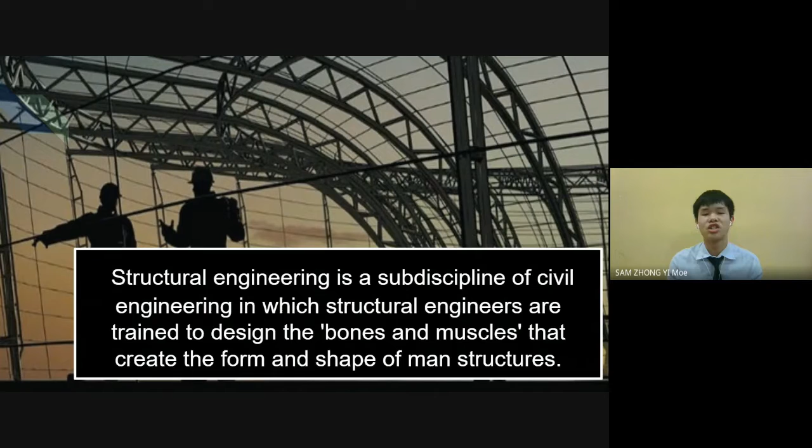Structural engineering is a subdiscipline of civil engineering in which structural engineers are trained to design the bones and muscles that create the form and shape of man-made structures. Structural engineering includes all structural engineering related to the built environment, including buildings, bridges, dams, roads, and tunnels.

Roles of structural engineers are: first, analyzing blueprints, maps, reports, and topographical and geological data. Second, estimating the cost and quantities of materials, equipment, and labor. Lastly, inspecting project sites to monitor progress and ensure the project is being constructed according to the design specifications.

Next, I'd like to introduce geotechnical engineering. Geotechnical engineering is the branch of civil engineering concerned with the engineering behavior of earth materials. It is the study of the behavior of soils under the influence of loading forces and soil-water interactions.

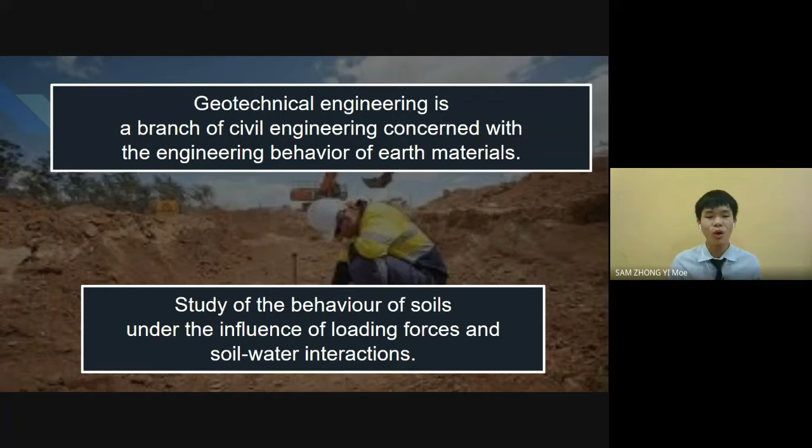Geotechnical engineers use principles of soil mechanics and rock mechanics to, first, investigate subsurface conditions and materials; second, determine the relevant physical and chemical properties of these materials; and lastly, assess risks posed by site conditions.

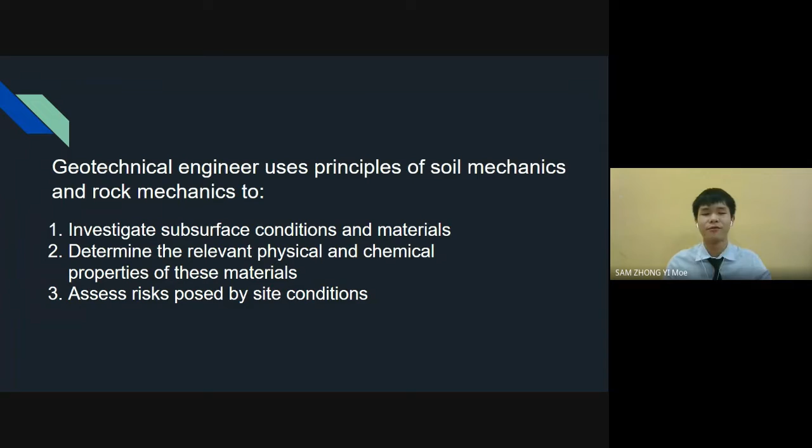Next is about geological engineering. Geological engineering is the application of geological knowledge to the siting, design, construction, operation, and maintenance of civil engineering structures and facilities. The roles of geological engineers are, first, analysis of past and future ground behavior.

Second, mapping at all scales. Lastly, geological engineers also have the job of designing mines to remove minerals in a safe and efficient way for use in utilities and manufacturing.

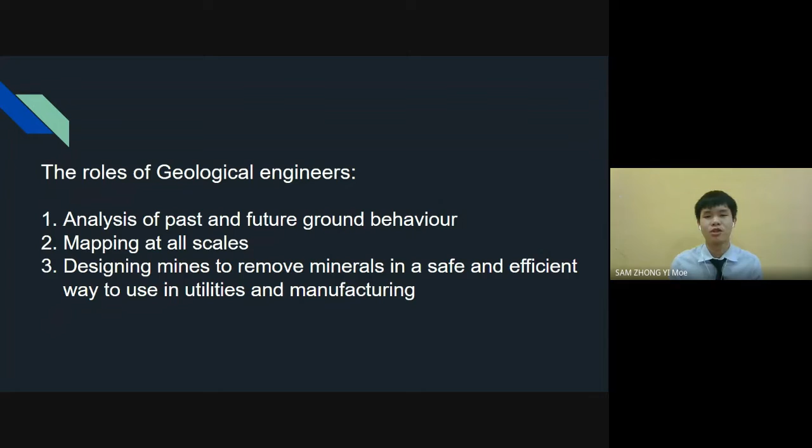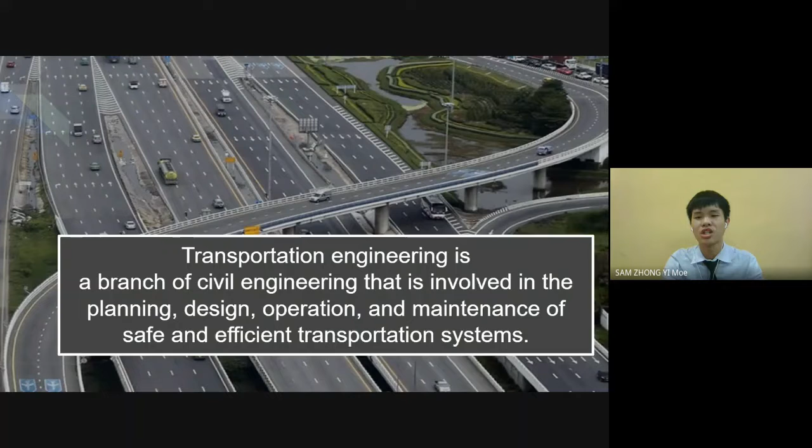Last is about transportation engineering. Transportation engineering is a branch of civil engineering involved in the planning, design, operation, and maintenance of safe and efficient transportation systems. These systems include roadways, railways, waterways, and intermodal operations.

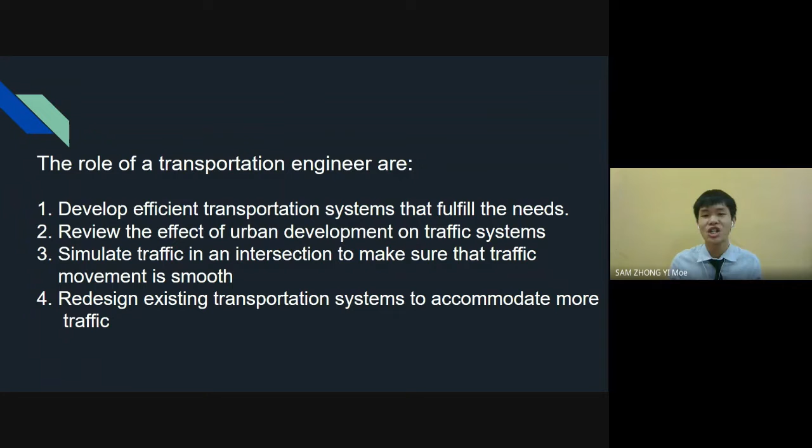The roles of a transportation engineer are, first, to develop efficient transportation systems that fulfill the needs. Second, review the effect of urban development on traffic systems. Third, simulate traffic in an intersection to ensure traffic movement is smooth. Lastly, redesign existing transportation systems to accommodate more traffic.

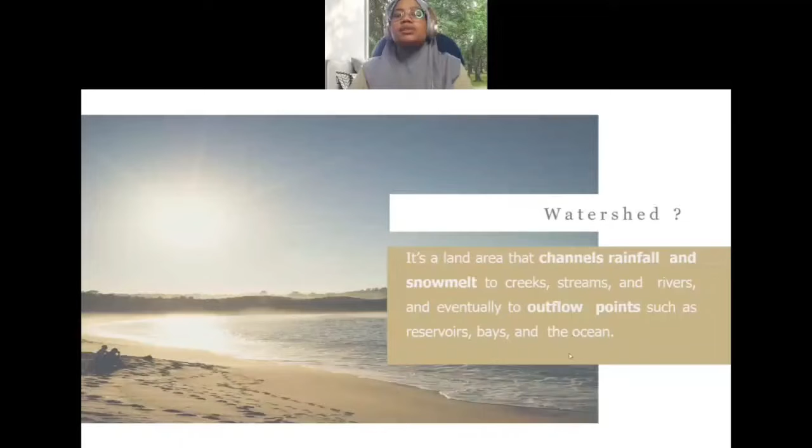I'm going to continue with the next subfield of civil engineering: water and environmental engineering. A watershed is a land area that channels rainfall and snowmelt to creeks, streams, and rivers, and eventually to outflow points such as bays and the ocean. So basically, a watershed is a water collection area. There are two types of watershed: developed watershed and natural watershed.

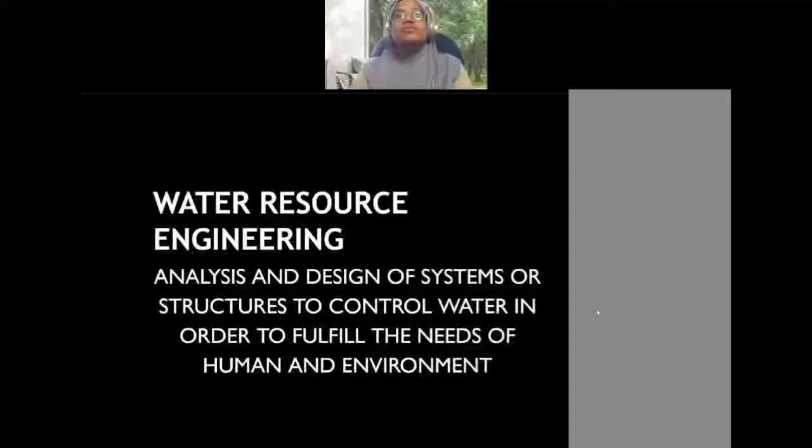Water resource engineering is the analysis and design of systems or structures to control water in order to fulfill the needs of humans and the environment, controlling the quantity and quality of water, time of water supply, and distribution of water. A water resource engineer is a civil engineer with skill in planning, design, and operation.

As well as managing the surface and groundwater system, preservation and improvement of the natural river and watershed environment, design and construction of water control facilities, and conservation of water resources.

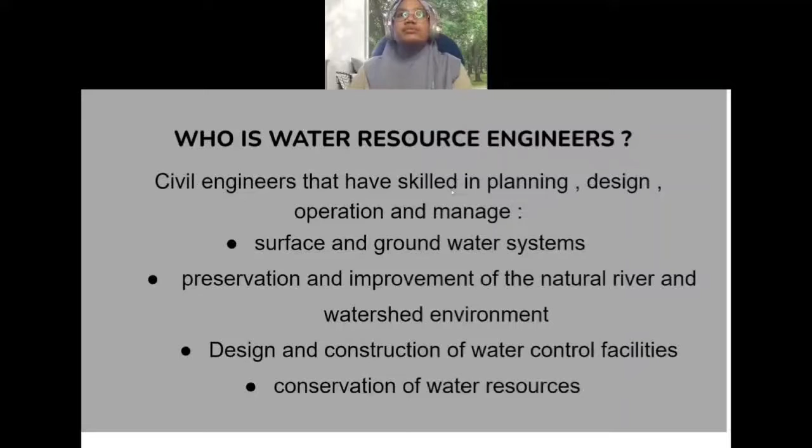A water resource system is a structure or facilities that are able to treat, store, and convey water. There are two types of water resource systems: water control systems and water use systems. A water control system is a structure in a water management system that conveys water, controls the direction or rate of flow, or maintains a desired water surface elevation.

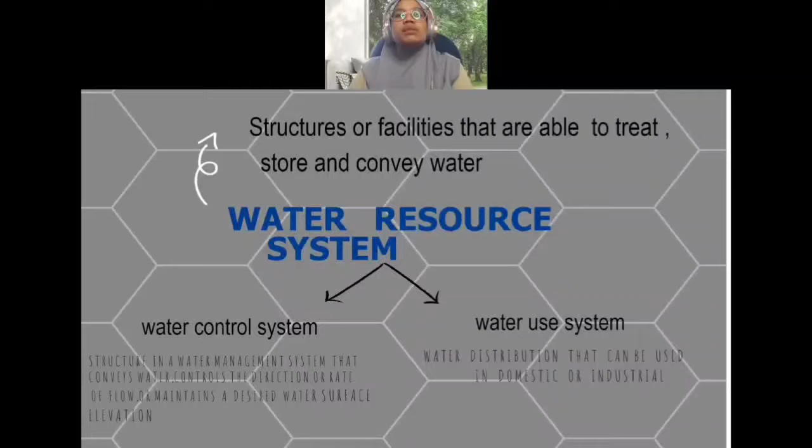While a water use system is water distribution that can be used domestically or industrially. Coastal engineering: the coast is land that borders an ocean or a sea, and coastal describes things that affect the coast or are located there. There are a few coastal zones: the surf zone, which is the intertidal zone between the low and high water mark; the backshore, the inland area of the surf zone; the nearshore, the breaker zone of waves; and offshore, the area further out to sea and beyond the influence of waves.

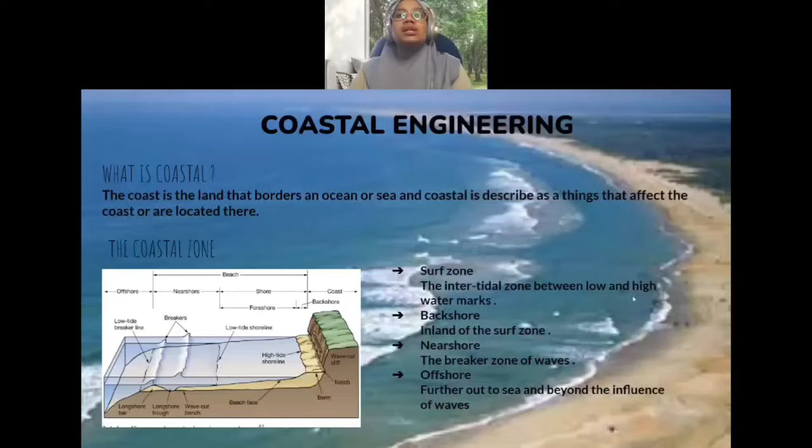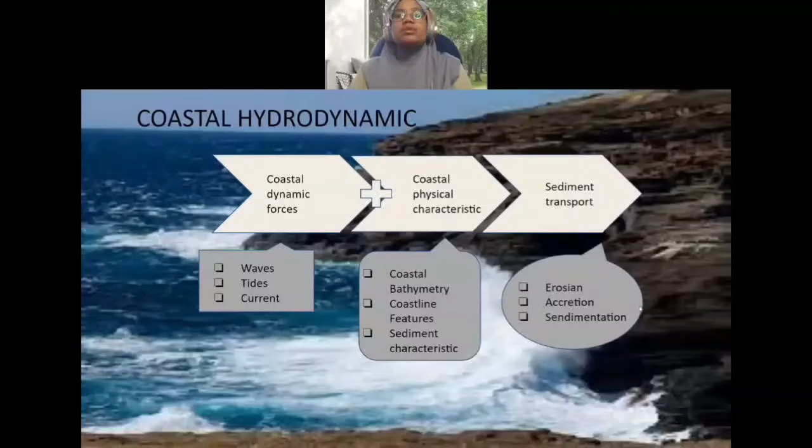Coastal hydrodynamics is a coastal dynamic force that meets with coastal physical characteristics, causing sediment transport to happen. Sediment transport includes erosion, accretion, and sedimentation. There are a few threats in the coastal zone, including beach and coastline erosion, environmental threats, river mouth sedimentation, sea level rise, extreme storms, tsunami waves, and inundation.

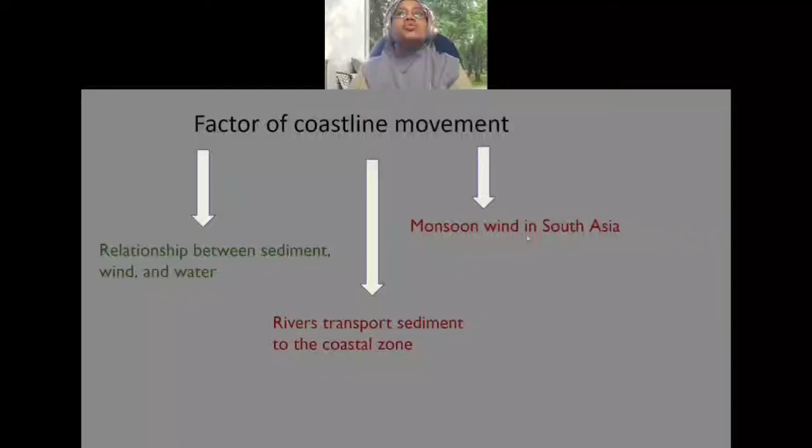The factor of coastline movement is the relationship between sediment, wind, and water. Next, rivers transport sediment to the coast, along with the monsoon wind in South Asia. So why does the beach erode? There are two reasons.

First is sediment transport in the coastal cell. Within a specific coastal cell, there is a pattern of sediment supply and demand. Next is change in equilibrium of sediment transport.

There are a few factors why there is a change in equilibrium of sediment transport. First, seasonal changes. Next, global climate change. Third, upstream river developments. Next, sand mining and coastal protection structures.

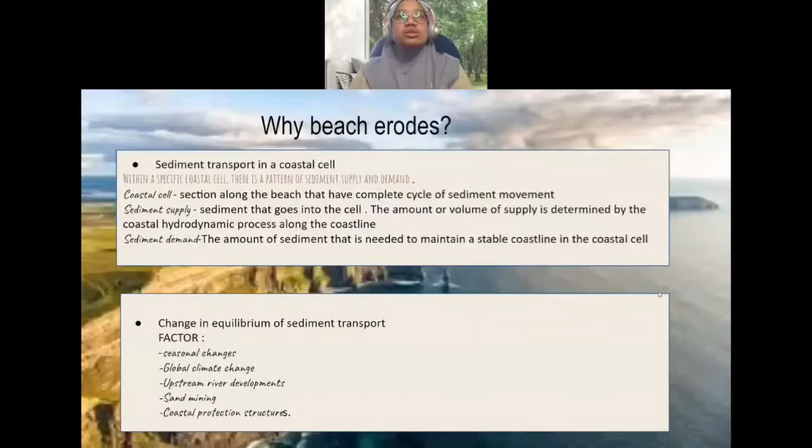There are a few strategies to protect against coastal erosion, such as seawall, groin, detached breakwater, submerged breakwater, and beach nourishment.

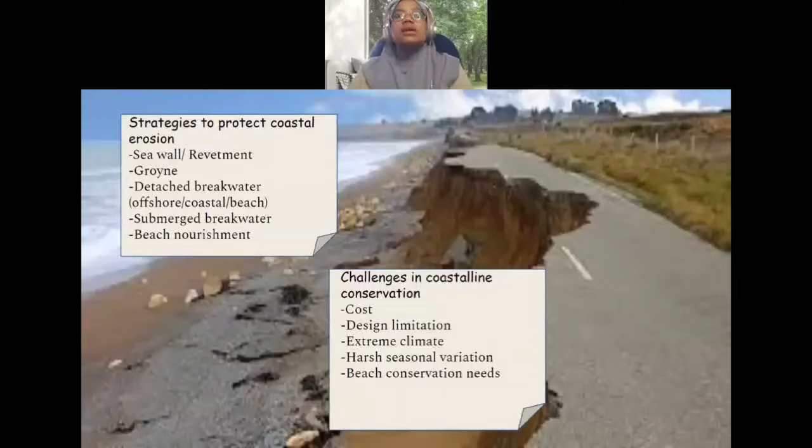The challenges that need to be faced by engineers in coastline conservation are: first, cost; second, design limitation; next, extreme climate, harsh seasonal variation, and beach conservation needs.

We will continue with environmental engineering. Environmental engineering is a field of engineering concerned with preventing humans from being harmed by environmental factors. We know that we have a lot of environmental issues.

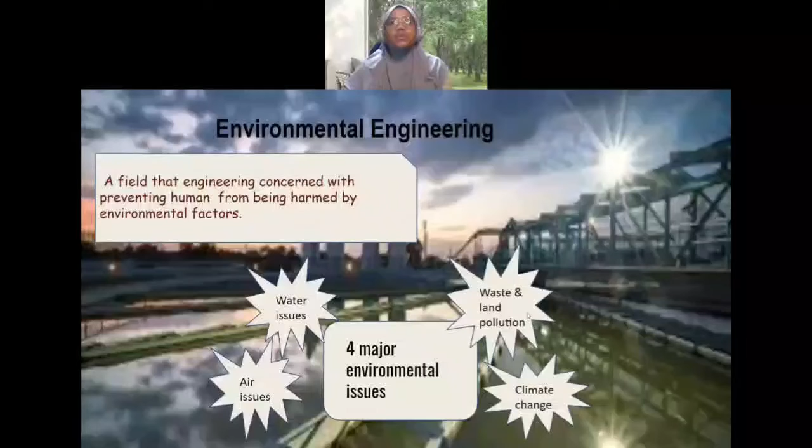There are four major environmental issues: first is air issue, next water issue, waste and land pollution, and climate change. There are a few factors why water can be polluted: first, chemical waste from industrial sources, marine dumping, and the use of pesticides.

There are a few effects of water pollution. For example, lack of water supply can also affect our marine life and human health.

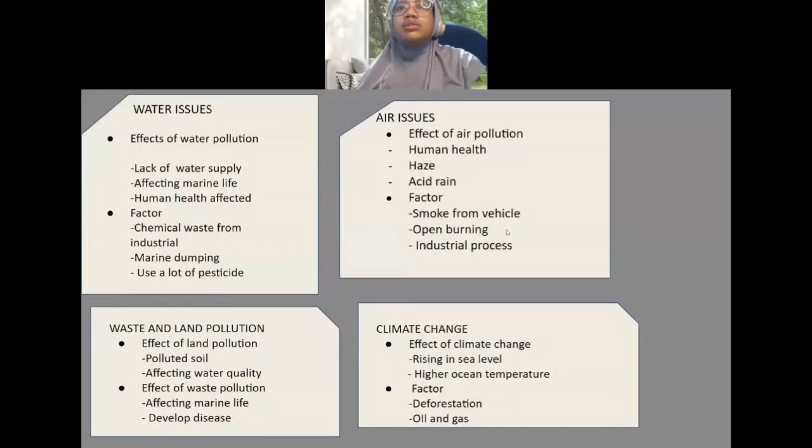In air issues, air becomes polluted because of smoke from vehicles. Day by day, the number of vehicles on the road is increasing, and for some reason people avoid using public transport. Next, open burning as well as industrial processes. Because of these factors, human health can be affected and we can face haze and acid rain.

In waste and land pollution, there are a few effects of land pollution, such as polluted soil, and it can also affect our water quality. As for waste pollution, it can affect our marine life and develop some diseases.

In climate change, the factors include deforestation as well as oil and gas. These can affect rising sea levels and higher ocean temperatures.

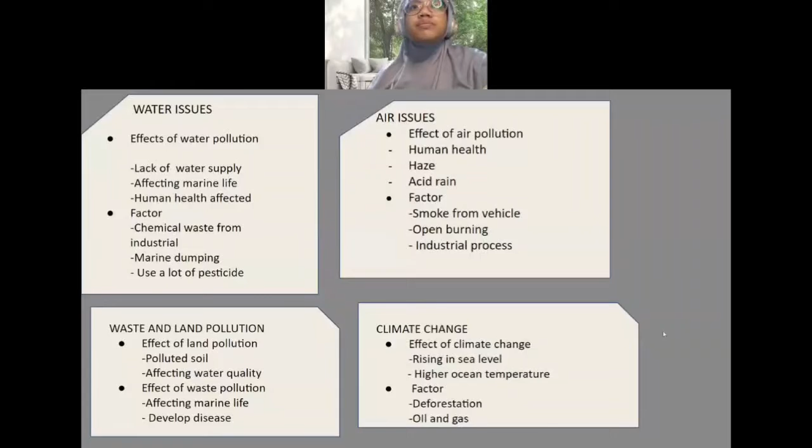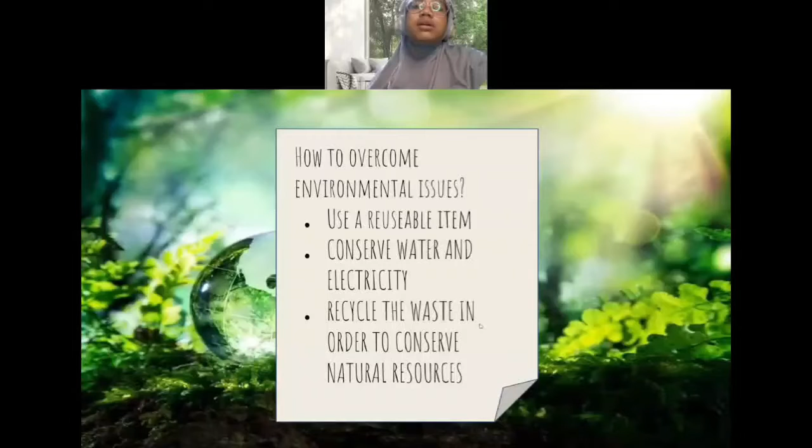There are a few ways to overcome environmental issues. For example, we can use reusable items. We can also conserve our water and electricity. We can also recycle waste in order to conserve natural resources.

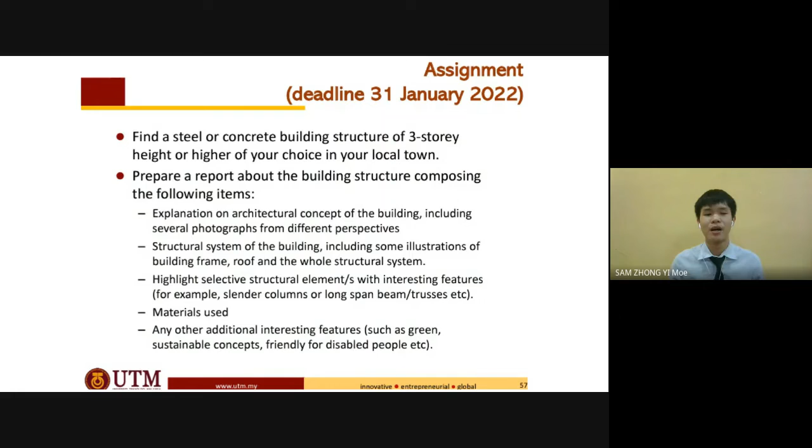Now we have come to the second part of this video, where we will explain and discuss the four assignments. First is about the structural and material engineering assignment. Students are required to find a 3-story building and explain its architecture concept and structural system.

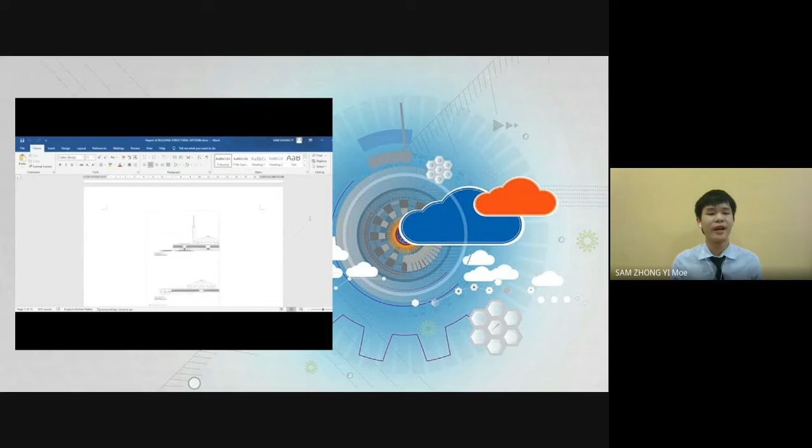My group members used Masjid Negara, located in Kuala Lumpur, Malaysia. The mosque was built to fit the tropical environment of the area. A big meeting space is created by the concrete roof, which is supposed to look like an open umbrella. The mosque interior is given a clean and stylish appearance by the design of the column and ceiling.

The next assignment is about geological, geotechnical, and transportation engineering. In this assignment, students will discuss issues of civil engineering related to geological, geotechnical, and transportation engineering in tropical climates.

Several issues that will occur in civil engineering are soil liquefaction in geological engineering, slope stabilization in geotechnical engineering, and pavement cracks, traffic congestion, and drainage systems in transportation engineering.

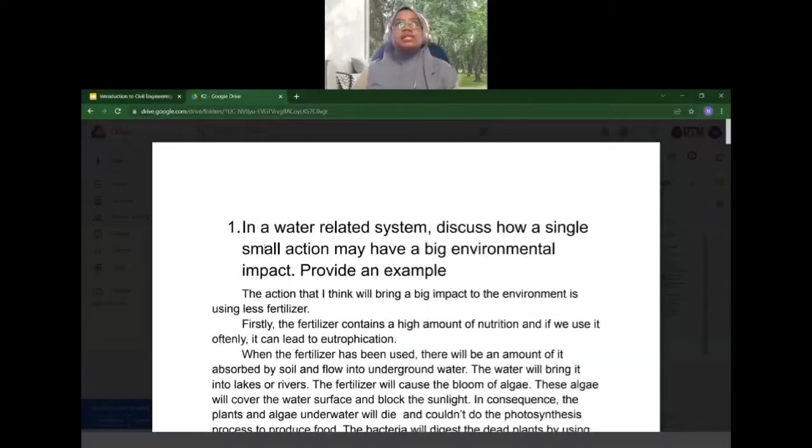Now we will discuss the water resources engineering assignment. The first question is: in a water-related system, we need to discuss how a single small action may have a big environmental impact, and provide an example.

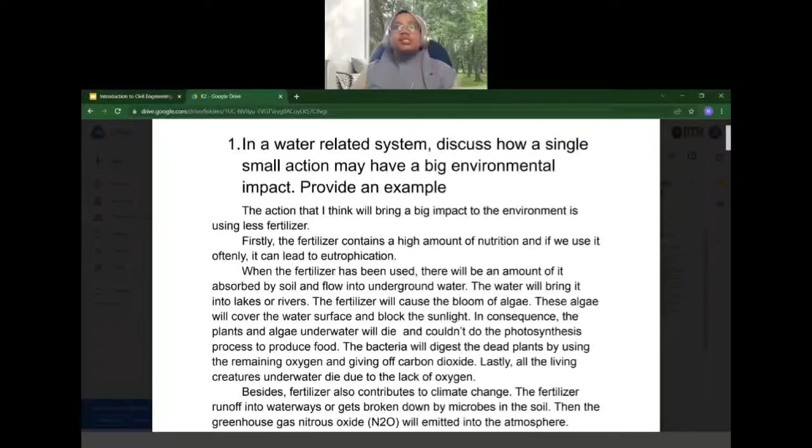The action that we think will bring a big impact to the environment is using fertilizer, because it can lead to eutrophication. Eutrophication is the death of living creatures underwater due to lack of oxygen. Using fertilizer can also contribute to climate change, where nitrous oxide gas is emitted into the atmosphere.

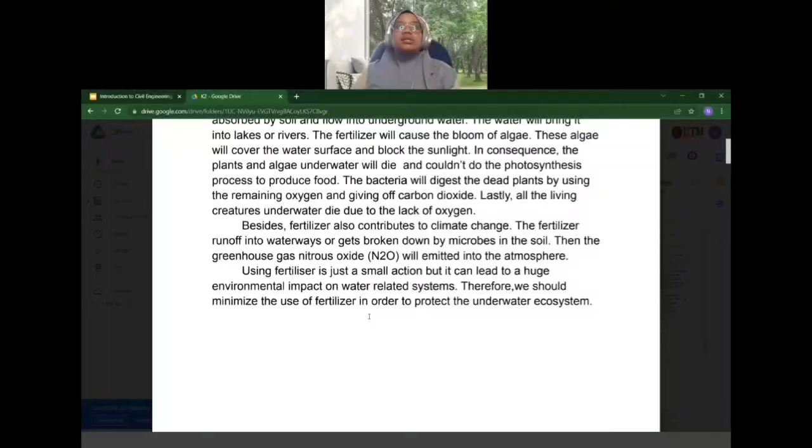It also can lead to environmental impact on water-related systems. The second question, we need to decide one of the problems that human activity can cause in watershed and how to minimize or eliminate it.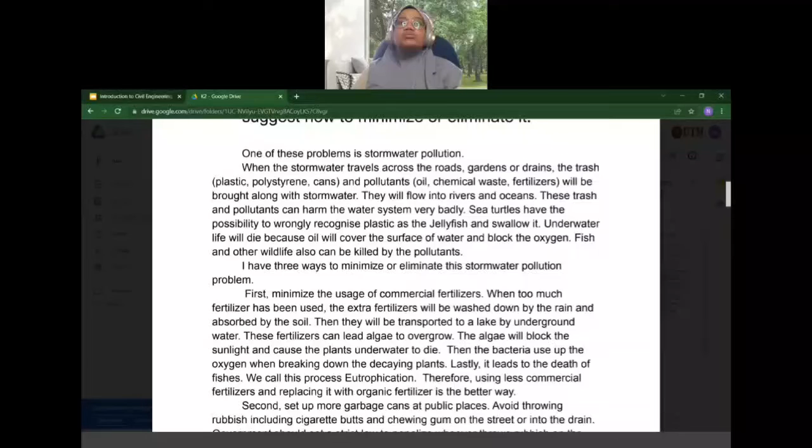The problem that will happen in watershed is stormwater pollution. The three ways to minimize or eliminate this problem: by minimizing the usage of commercial fertilizer. Instead of using commercial fertilizer, we can use organic fertilizer as a better way.

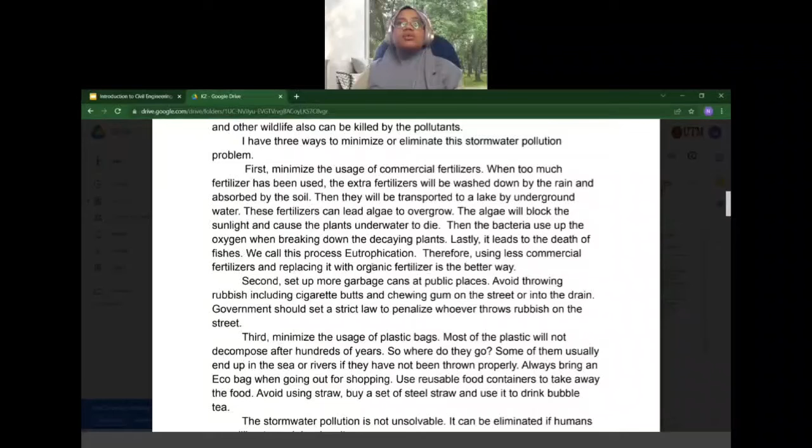Second, by setting up more garbage cans at public places, it can avoid us throwing rubbish on the street or into the drain. We also can minimize the usage of plastic bags. Instead of using plastic bags, we can use eco shopping bags.

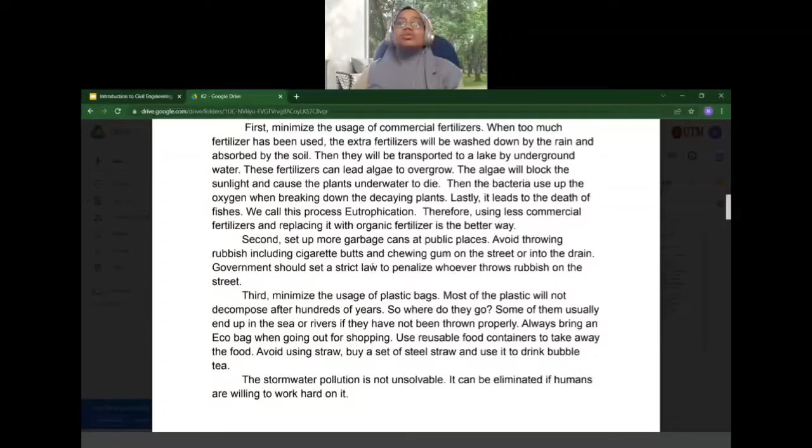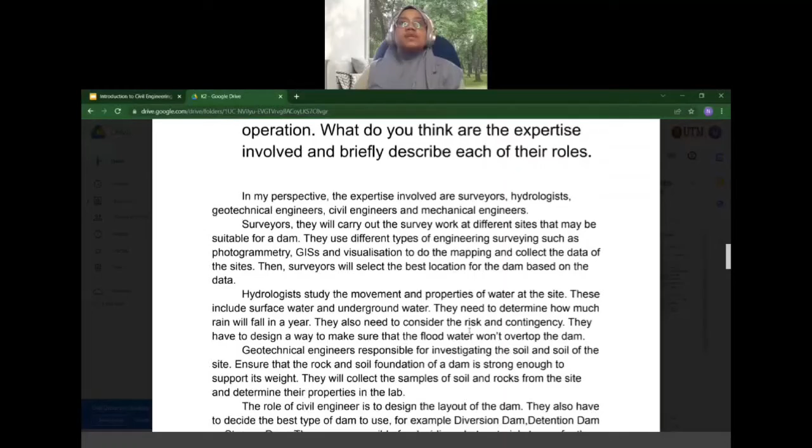Third question, we need to think about the expertise involved in a water resource project and briefly describe each of their roles. First is the surveyor, who will carry out survey work at different sites that may be suitable for a dam. Next is the hydrologist, who will study the movement and properties of water at the site.

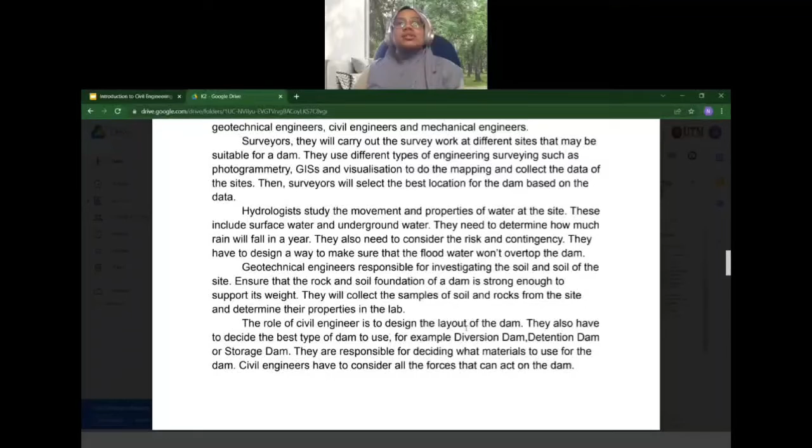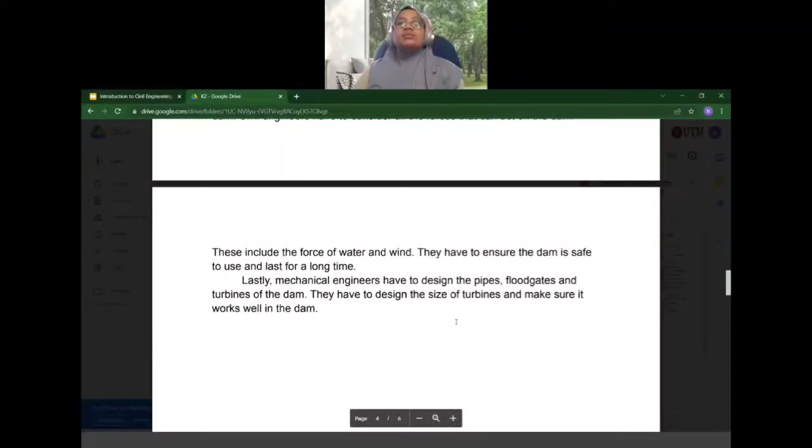Next is the geotechnical engineer, who will be responsible for investigating the soil at the site. The civil engineer will design the layout of the dam and decide the best type of dam. Lastly, the mechanical engineer will design the pipes, floodgates, and turbines of the dam.

For the fourth question, we need to explain how a change to any of the existing interacting parameters can create an imbalance that results in coastal erosion or accretion.

When coastal forces meet with the physical features, they will induce shear stress on the bed, which will resuspend other material into the water, and these are transported within the coastal circulation system. This can lead to accretion.

However, when the waves, tides, or currents strike the shore sediment and wash them away, this will change the shape of the coastline and lead to erosion as a result.

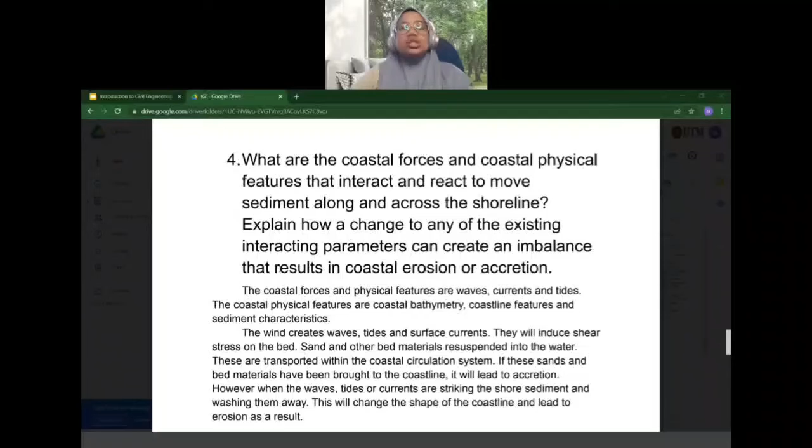The last question: based on our observation and personal experience, we need to suggest how the Malaysian public can help to reduce and mitigate water-related problems.

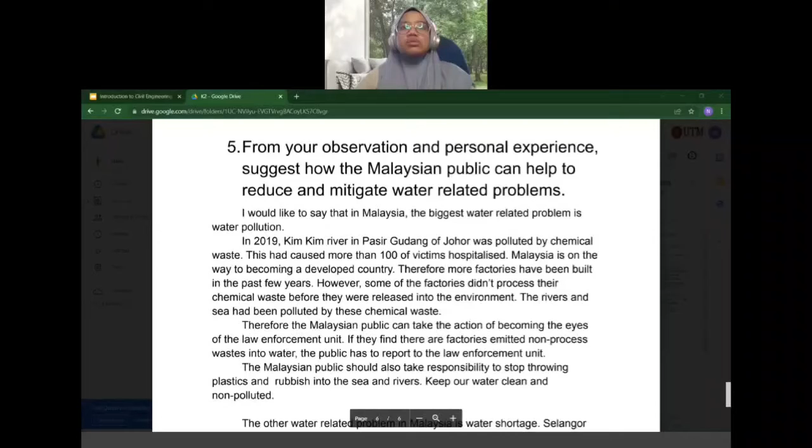The first observation is the Kim Kim River in Pasir Gudang, where it was polluted by chemical waste. In our opinion, we as the public can be the eyes of the law enforcement unit. If we find factories emitting unprocessed waste into the water, the public has to report it to the law enforcement unit. We also need to be responsible and stop throwing plastic and rubbish into the sea and river.

We also have a problem of water shortage in Selangor residential areas because they keep suffering from water disruption. Therefore, the Malaysian public has to use water safely.

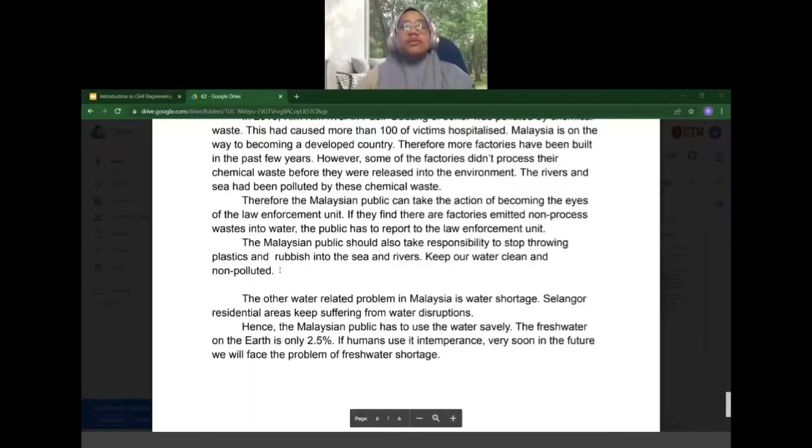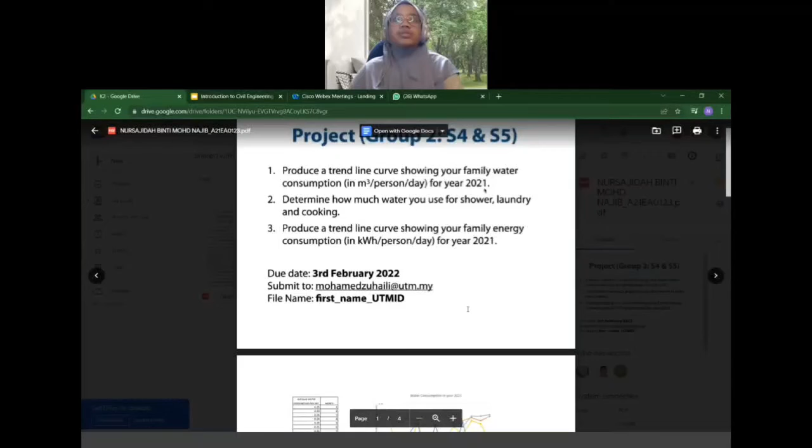Next is the environmental engineering assignment. For the first question, produce a trend line curve showing our family's water consumption.

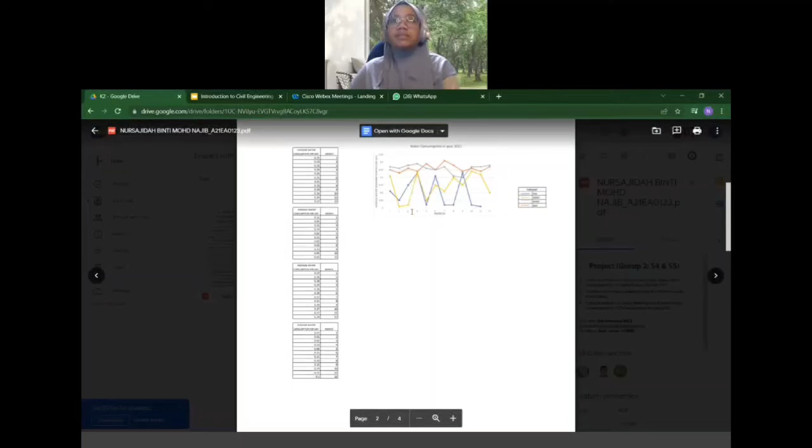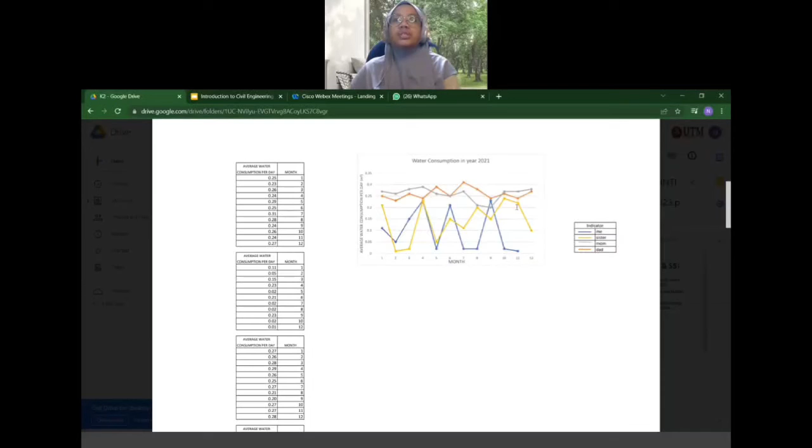As you can see, for this question, in my family we have 4 family members living in the same house. So we are using our monthly water bill, and generally I just assume each person's water usage for a year. This is the trend line curve and the indicator that shows each person's graph.

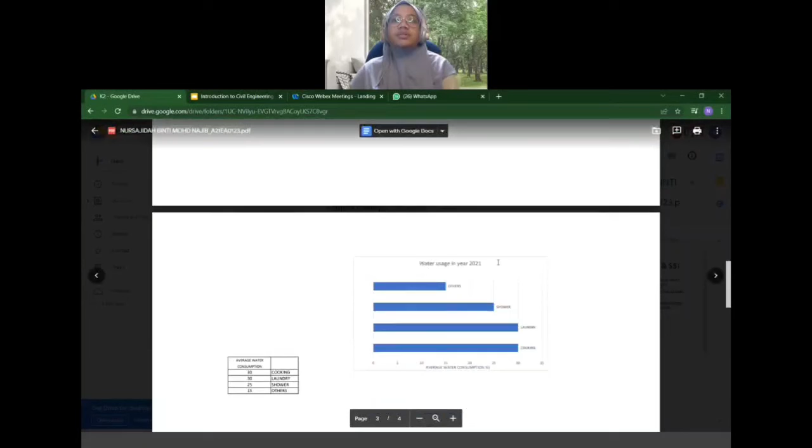For the next question, we need to determine how much water we use for shower, laundry, and cooking. For laundry and cooking, we always use water because they are daily activities, as well as shower, but not as much as laundry and cooking.

Others is related to things like gardening or washing our car or motorcycle.

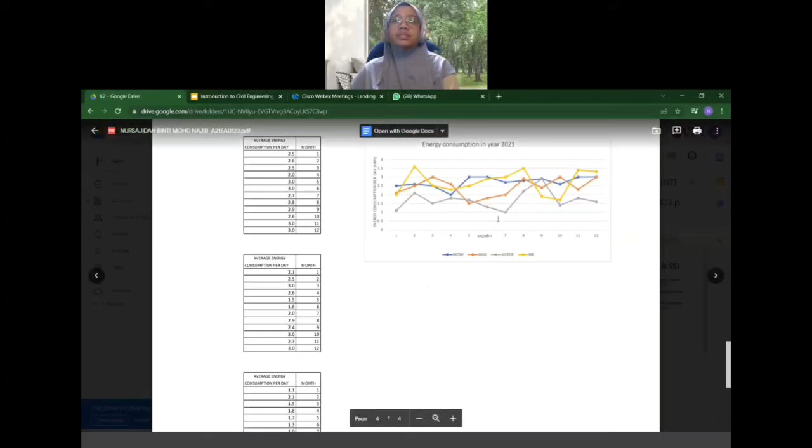Next, we need to produce a trend line curve on our energy consumption for a year. So this is the trend line curve that I produced from our monthly bill, and I just assumed each person's energy consumption for a year.

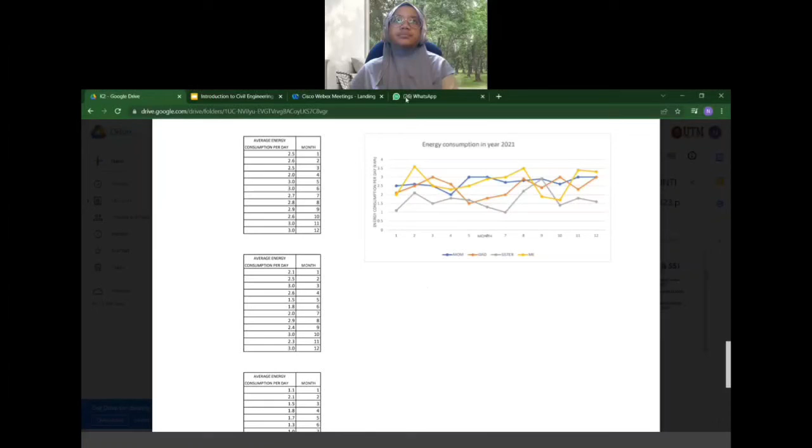So that's all. Thank you.

As a summary, throughout the 4 assignments, we can conclude that civil engineering plays an important role in our daily life. This is because civil engineers shape the world we live in. They design, build, and maintain the infrastructure we use every day. They also ensure our safety when using these infrastructures. Hence, we should appreciate what civil engineers had done for us.